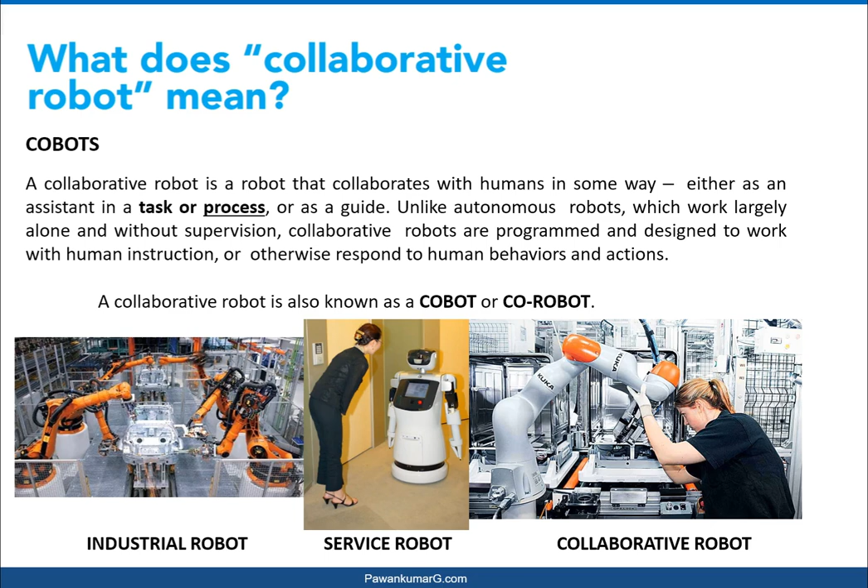So here we can understand what a collaborative robot is. It collaborates with humans in some way, like as a helping guide. Unlike autonomous robots which work largely alone and without supervision, collaborative robots are programmed and designed to work with human instructions. We shortly call them cobots. It means collaborative robots. Yeah, we'll move to the next.

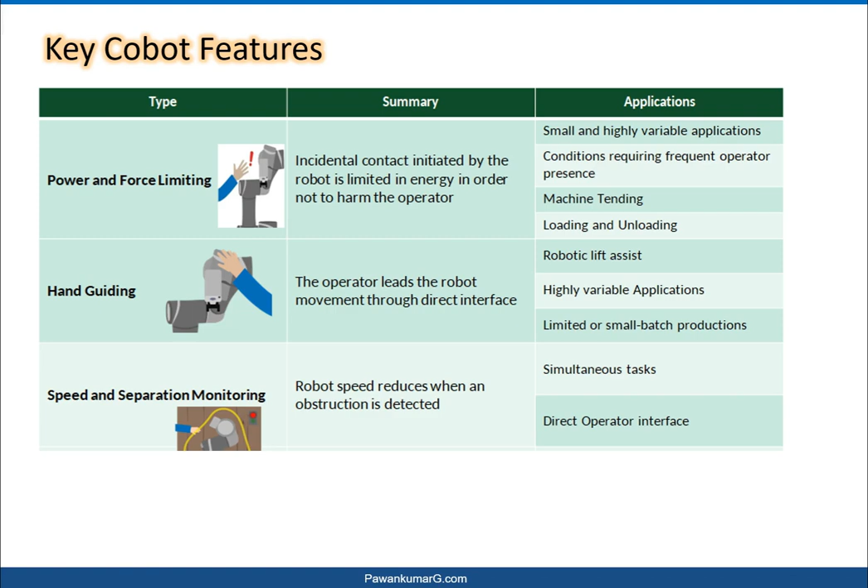You can consider that there will be safety scanners continuously scanning the area around the cobot, and whenever there is human intervention, the cobot reduces its speed of operation in order to protect humans from injuries, because more speed and momentum leads to more impact, which leads to injuries. So this feature protects us.

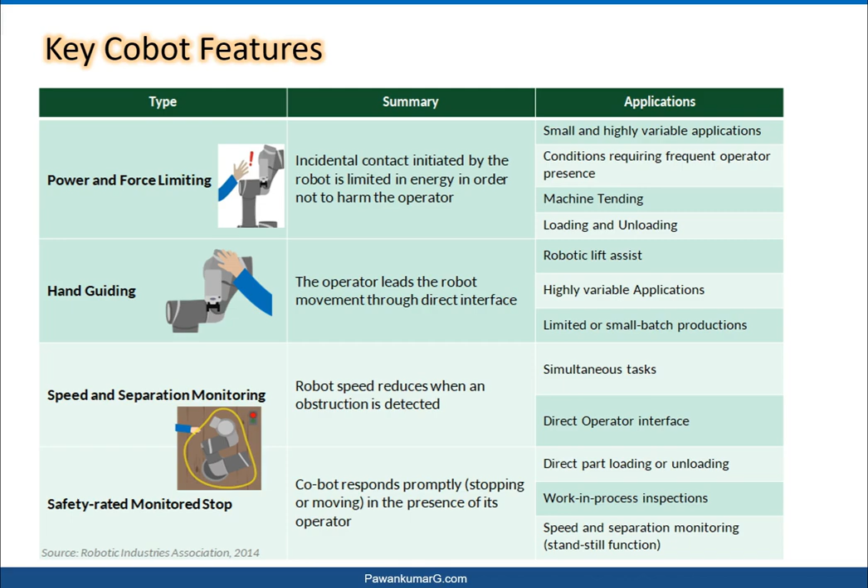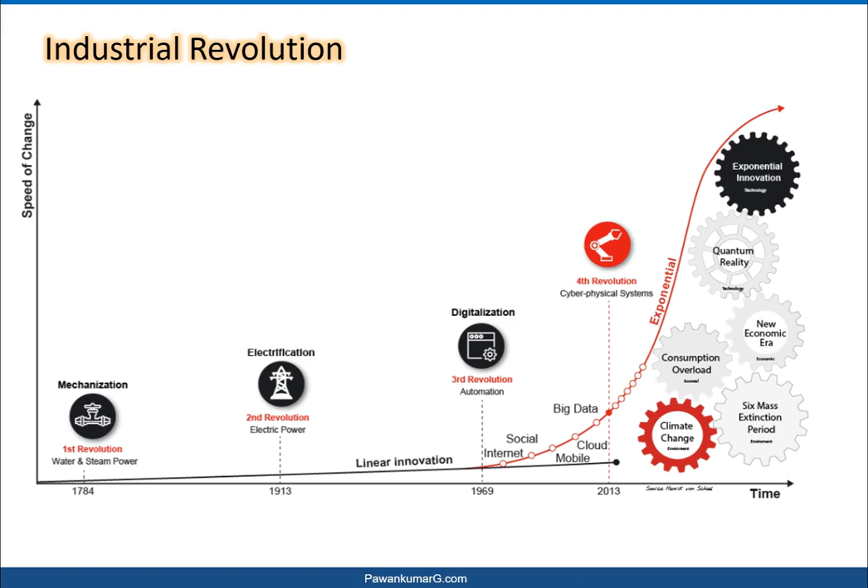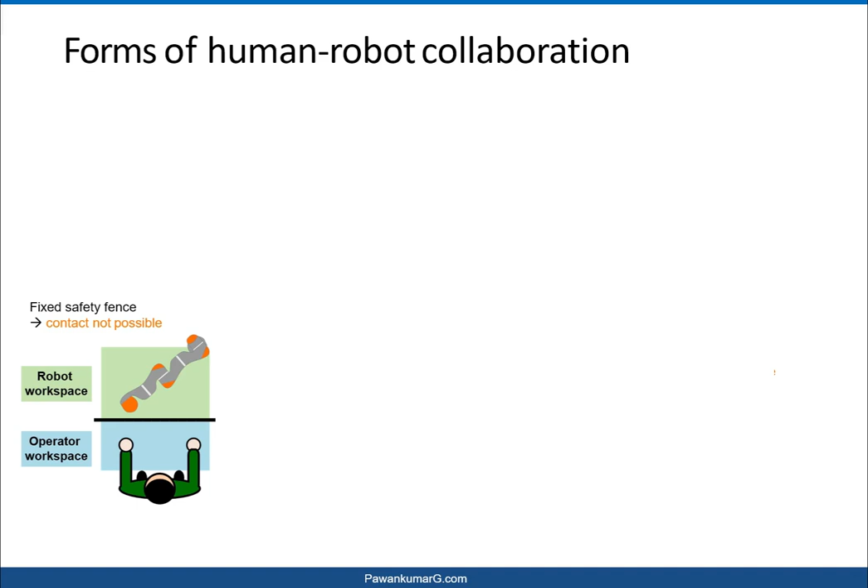So what are various forms of human robot collaboration? You can see in the green picture, man standing over the blue color workspace and robot is working over the green workspace. So both are separated from each other with the partition in between, which is shown in black color strip. So in this kind of collaboration, contact is not possible and there exists a safety fence.

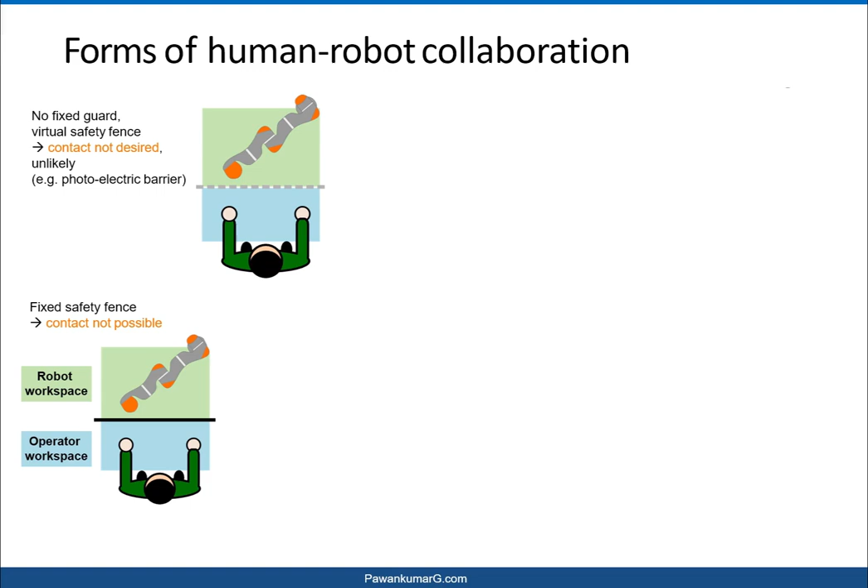In second place, you can see that both are separated with the help of a photoelectric barrier. It means contact is not desired, but if contact happens, then also no issues. Collaborative robot will detect the presence of operator in the green region and will trigger the safety stop. This kind of collaboration is used for specific tasks like loading, unloading, where operator is going to load the components to the fixture in the green.

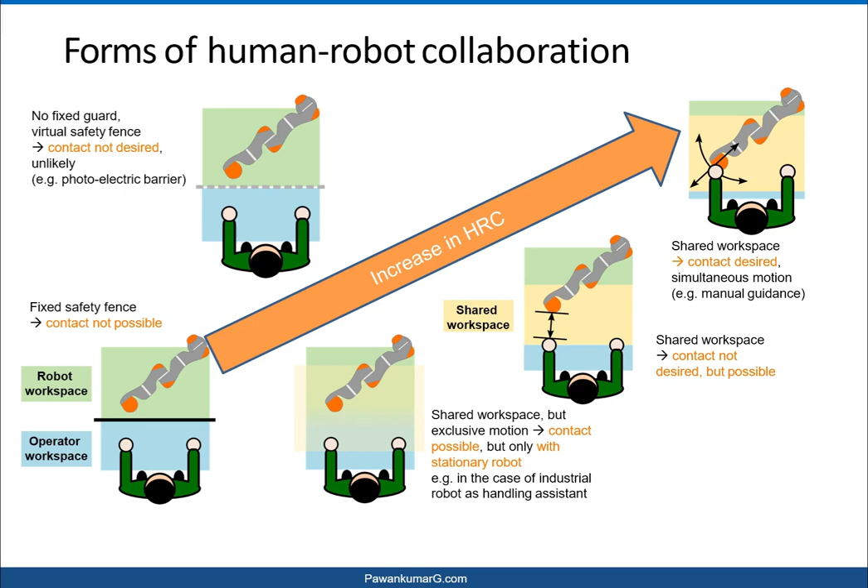So here you can see the hike in HRC, human robot collaboration. So in industry you can adopt any of these forms in the plant. So whenever you are adopting HRC, you need to see these are the cases where we can implement HRC, whether a semi HRC, like low HRC, or a high HRC, like we can see in the graph. Then we have categorized the types depending upon the collaborative effectiveness.

So coexistence, here both are separate, human and cobot. And please remember that even in coexistence, if operator enters the robot workspace, it is not going to harm him, because that's a cobot. But according to functionality, it is separated here.

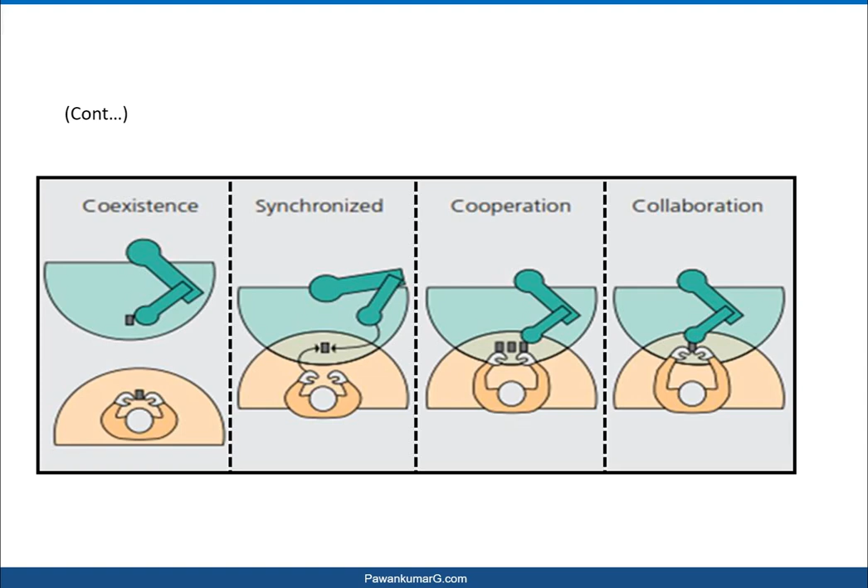So coexistence, synchronized. In synchronized, both are working alternatively, not simultaneously. In cooperation, both are working in a shared workspace, but both tasks are different. In collaboration, both task is same. It means simultaneous work is there, and contact will be happening here between cobot and human.

Next, we see benefits of cobot. So robots excel at simple repetitive handling tasks. Repetitive tasks will be quite boring for operators or human labor, but that same thing can be done with the help of cobot. Humans on the other hand have unique cognitive skills for understanding and adapting to any changes in the task.

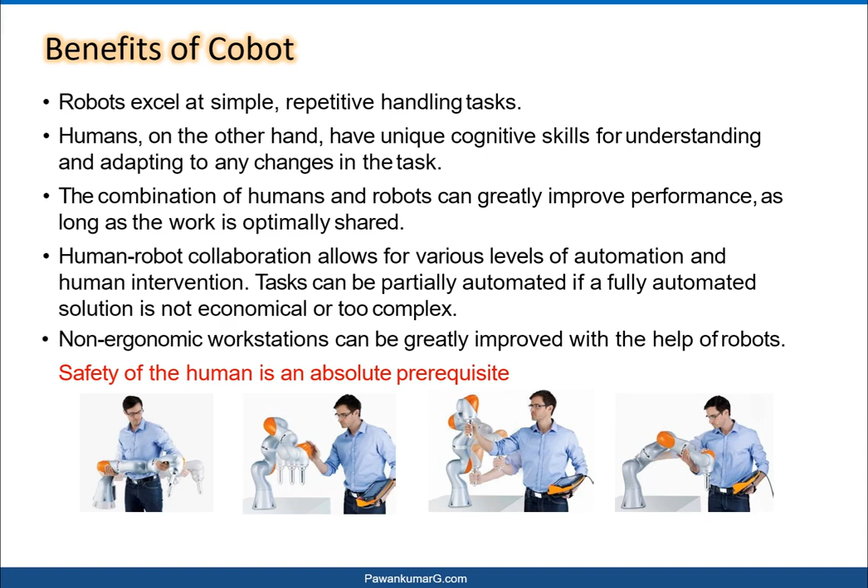So here, what we call skill, that skill we can implement with the help of cobot. That's the major benefit cobot is giving us. The combination of humans and robots can greatly improve performance, as long as work is optimally shared. So human robot collaboration allows for various levels of automation and human intervention. And even non-ergonomic workstations can be greatly improved with the help of robots here.

So another very big benefit we get from cobots is zero accidents. Nowadays plants are concentrating or focusing on zero accidents. These kinds of things are followed by plants. So in order to bring zero accidents across the working areas, we need to implement cobotic systems.

Now why ROS? Because ROS is language independent, and robotic manufacturers provide this API and SDK for ROS integration, which enables direct access to cobot hardware in real time, fulfilling the single point of control. So the ROS master will be able to control the robot as well as peripheral devices to which it is connected.

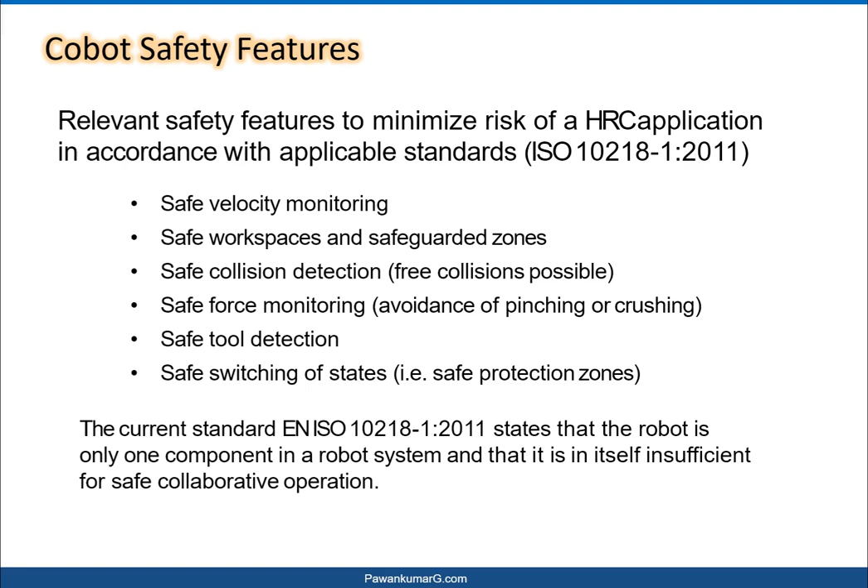Tool detection and safe switching of the states. Yeah, so the current standard states that the robot is only one component in the robot system, and that itself is insufficient for safe collaborative operation.

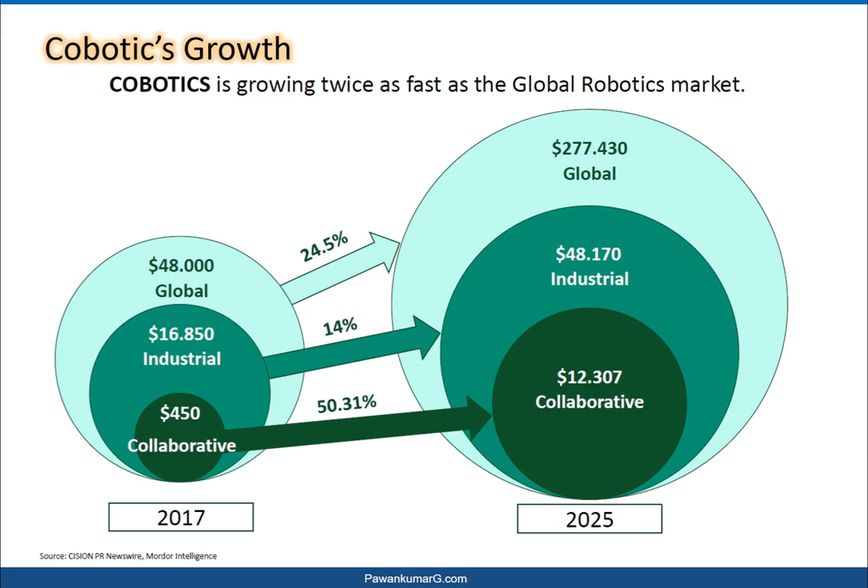So you can see the graph. We just see how cobots will be growing in upcoming days. So we are in 2020 now, and if you see the 2017 graph, you can see the pictorial representation of how much explosion will be happening by 2025.

So moving to next, increasing adoption of cobots. So the cobotic market, you can see here, revenue is also growing day by day. You can see how it is rising, and even the number of units shipped every year is also growing much more. By Europe, North America, Asia Pacific, and the rest of the world. So in 2015, how was the graph?

Europe is considered a large consumer of cobots, and even the automotive sector is very good for cobots. These are the applications where cobots are used, like material handling, general assembly, painting, inspection, others and welding.

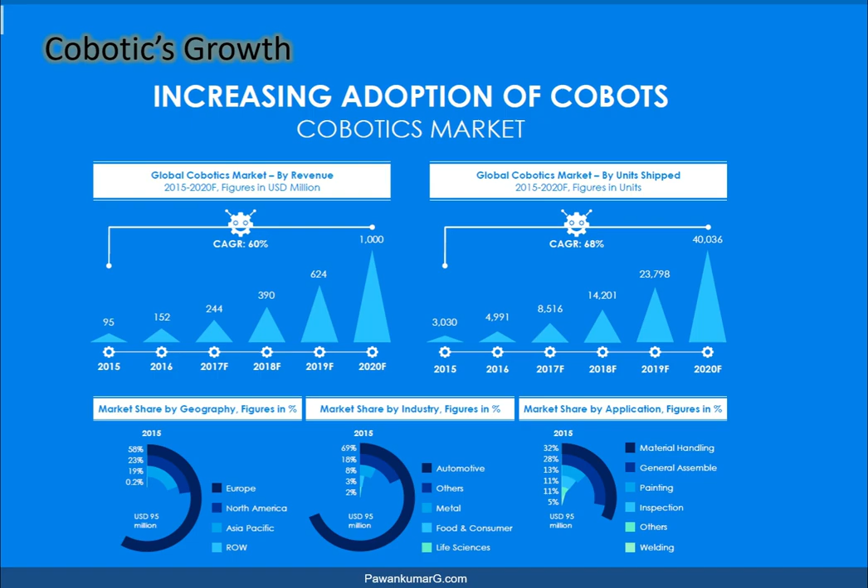So moving to next, what are the cobot types? Cobot types here means the basic types which are in the market now. If you go into the market and search for cobots, major manufacturers offer them in two categories. One is the lightweight robot and another is the two arm robot. A lightweight robot is just a simple single articulated robot, and two arm means there will be two arms, two articulated manipulators connected to a single body.

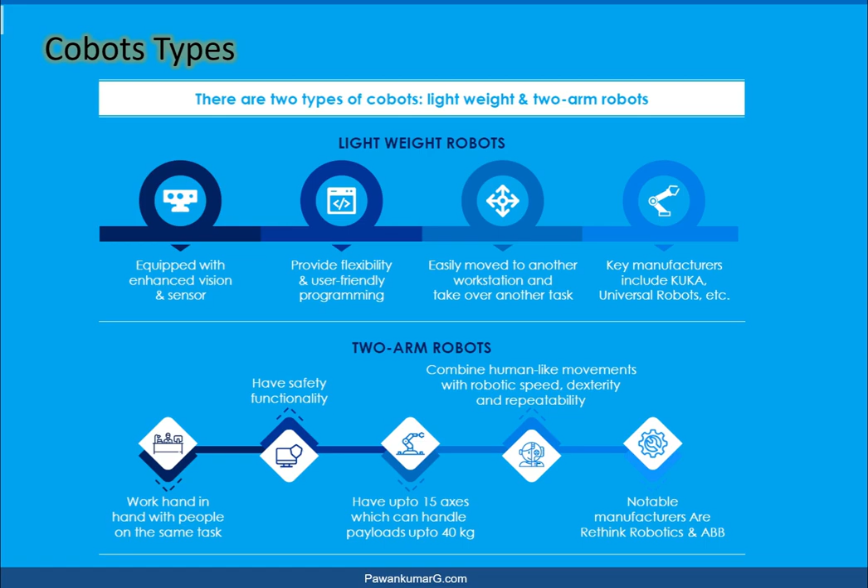These function like humans. So you can see lightweight robots are equipped with sensors, providing flexibility for programming, and key manufacturers here are KUKA, Universal Robots. If you see two arm robots, we have 15 axes which can handle payloads up to 40 kg, and major manufacturers for two arm robots are ABB, Rethink Robotics.

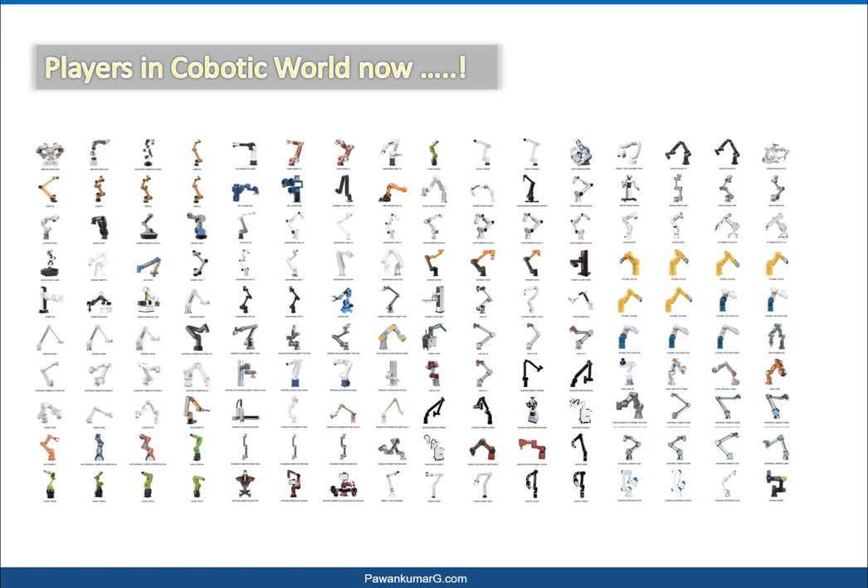Okay, so these are the players in the cobotic world now. If you go outside, you can find this many cobotic manufacturers. They are majorly of Chinese and Japanese origin. So you can see the first robot shown in the picture is a two arm robot, and the remaining ones are single arm articulated.

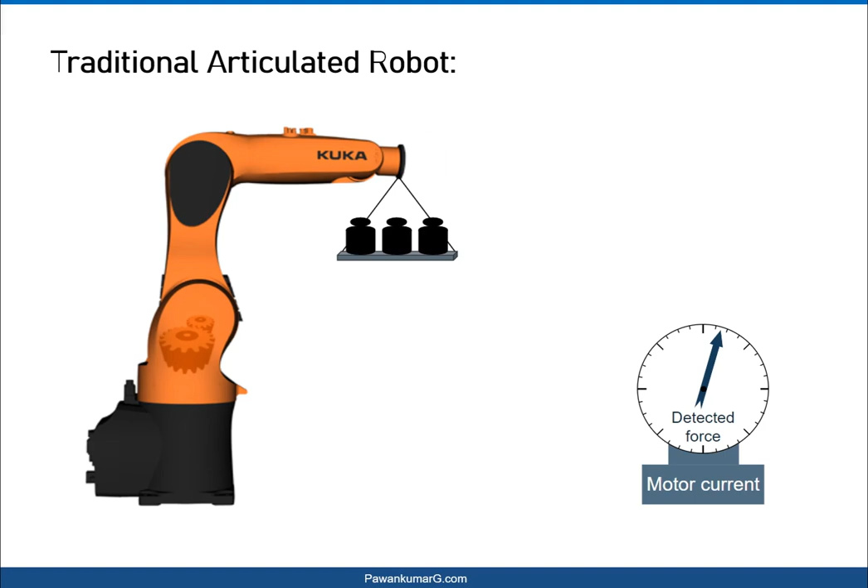So what is the primary difference between a robot and a cobot? See, this is the traditional articulated robot which you are familiar with. These robots are just mechanical, electromechanical machines which are working inside a cage. It means they are not able to detect any external force. You can see in the example, I have attached some weight to the flange, to the end effector of the robot, and the detected force here is very less sensitive.

Why less sensitive? Because it is using motor current feedback from the servo motors. So these values are not sensitive. That's why we can't rely on motor current feedback kind of detection. So what I did, we attached one force sensor over the end effector, and now we are measuring the weight. Now you can see the difference. Motor current is detecting some small force here, it is negligible, it is not able to detect, and the force detected by the sensor is actually very high.

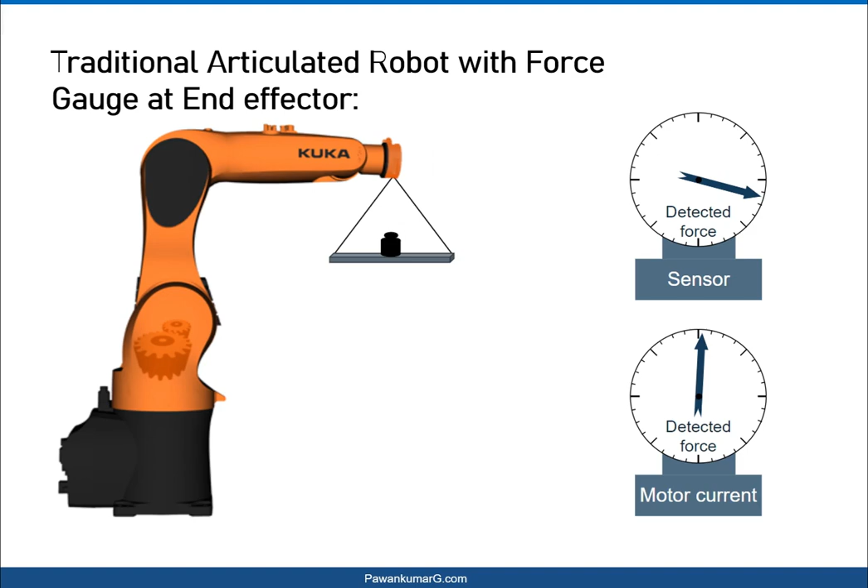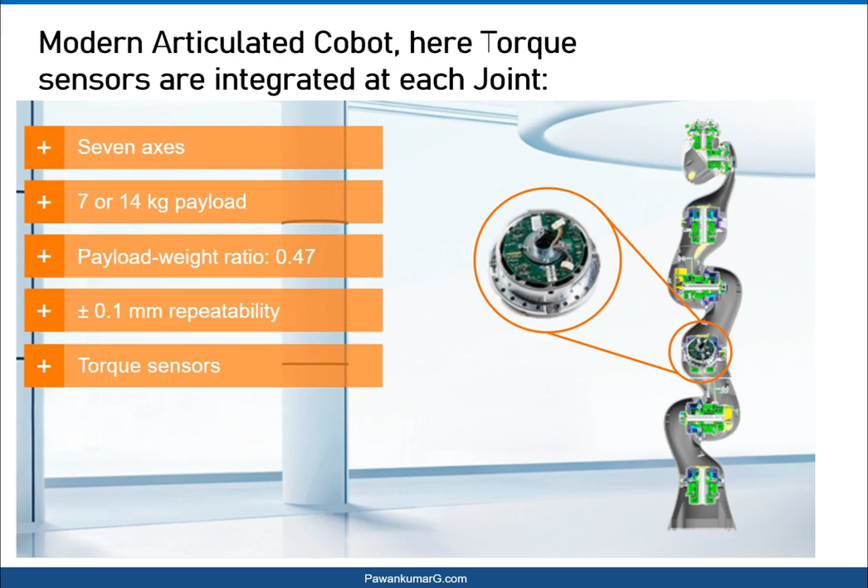So what we do usually is integrate this force sensing into all of the axis motors to detect external force. This cobot is not only meant for positional kinematics, but it also has force kinematics. It means the cobot is able to detect force at the TCP with the help of the kinematic chain of these torque values. Each and every axis is giving some torque value. With that value, the cobot is able to detect how much force is applied at the TCP, a virtual TCP, anywhere in space. This capability allows us to program cobots for certain complex applications where we need sensitivity.

So first, the major application is in assembly. Why? Because assembly needs some human intervention, it is sometimes complex, and there is more productivity when we integrate the cobot with the human, right? Human intervention is there, so we need to concentrate on assembly. In assembly you can see some examples like screw driving and part insertion.

The next application is dispensing. Dispensing means we can use it for applying glue, seal, or painting. For painting applications also you can use a cobot, where a human can intervene during sealing, gluing, or painting in some complex areas. This kind of application provides proper collaboration, and we can achieve good productivity and efficiency in painting, gluing, and sealing. Next, finishing. Finishing means sanding or polishing.

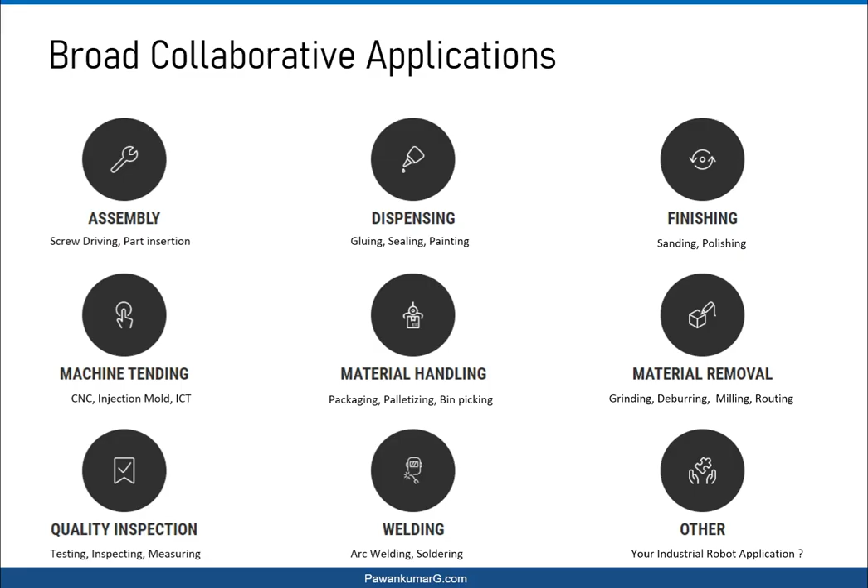Next, machine tending in CNC, injection molding, ICT, we can use it. Material handling, packaging industries, palletizing, even bin picking can use cobots to eliminate cages in low footprint areas, because packaging usually has very low space. Even in material removal, grinding, deburring, milling, routing, again force detection is very crucial. Quality inspection, welding, and other applications also. Even in welding we can use cobots. Universal Robots already has applications for arc welding and soldering.

So we will see what collaborative assembly is. Assembly robots are used for lean production and industrial processes, and have expanded production capabilities in the manufacturing world. An assembly line robot can dramatically increase production speed and consistency. They also take over tedious and dull assembly line jobs.

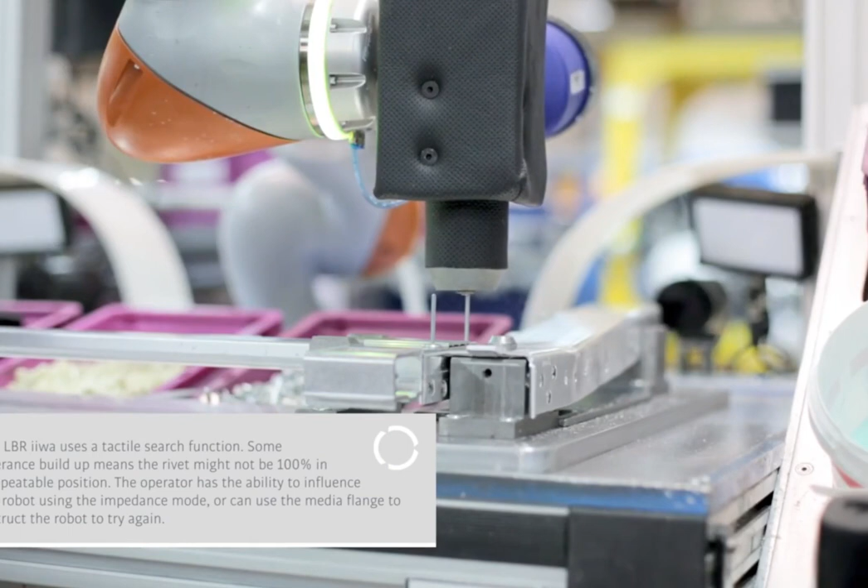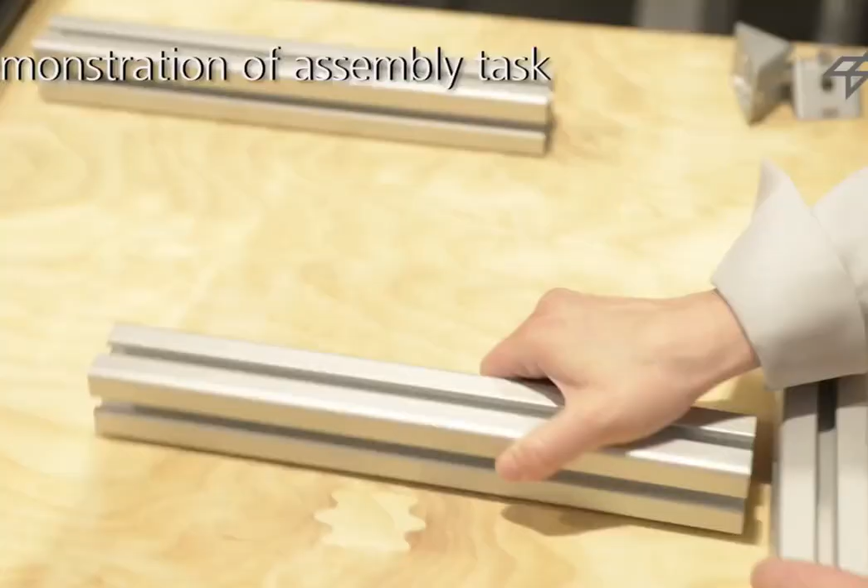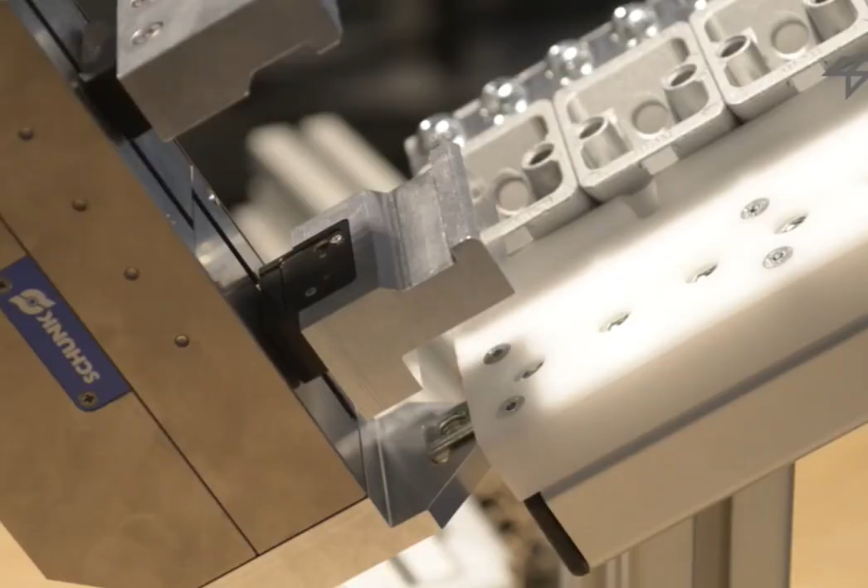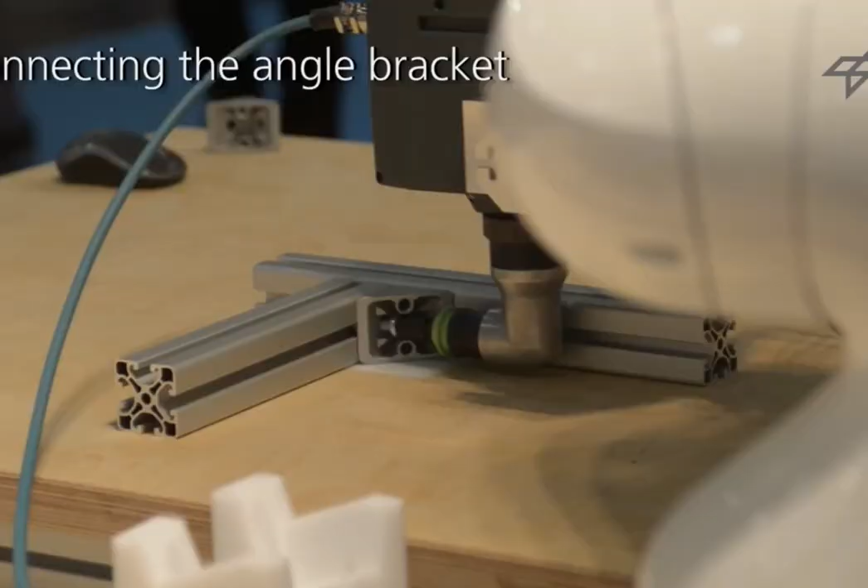Next slide, you can see here we are using a vision system. So this assembly task will be carried out with the help of vision. The camera is recording what the procedure of assembly is. Once teaching is done, and teaching is also automatic, once automatic mapping is done, the cobot is going to do the task in reality. So this is how it is working there. So after assembly, we will get the same assembly component which was taught earlier by the operator.

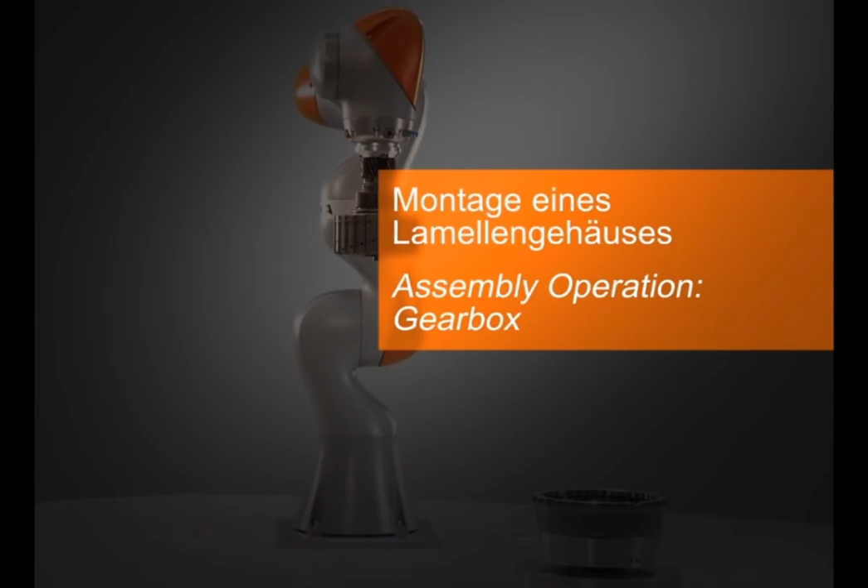So next, see gearbox assembly. Gearbox assembly is also one of the complex assemblies. We can see the robot became compliant during insertion in order to accommodate some irregularities.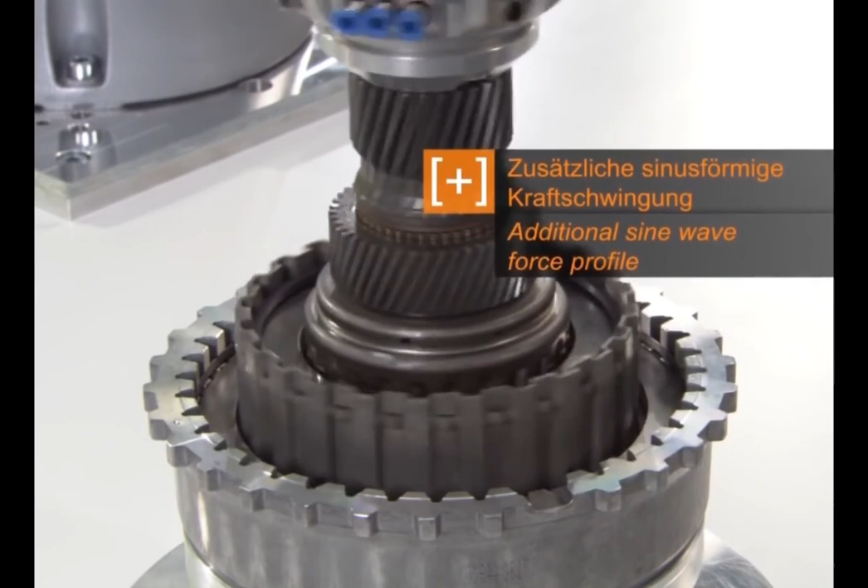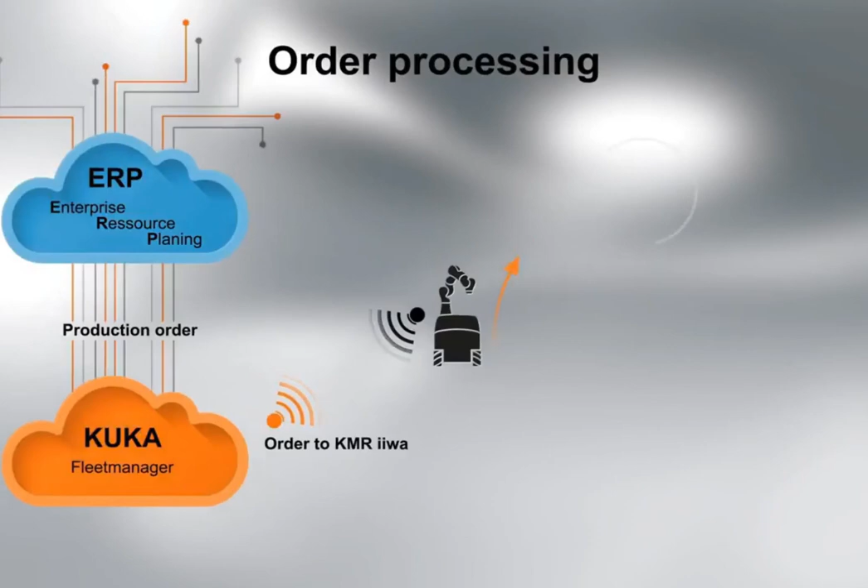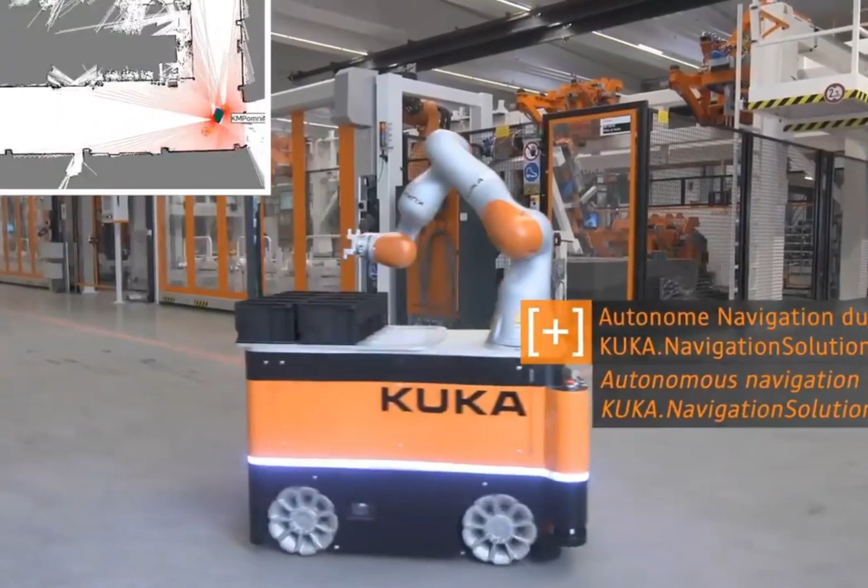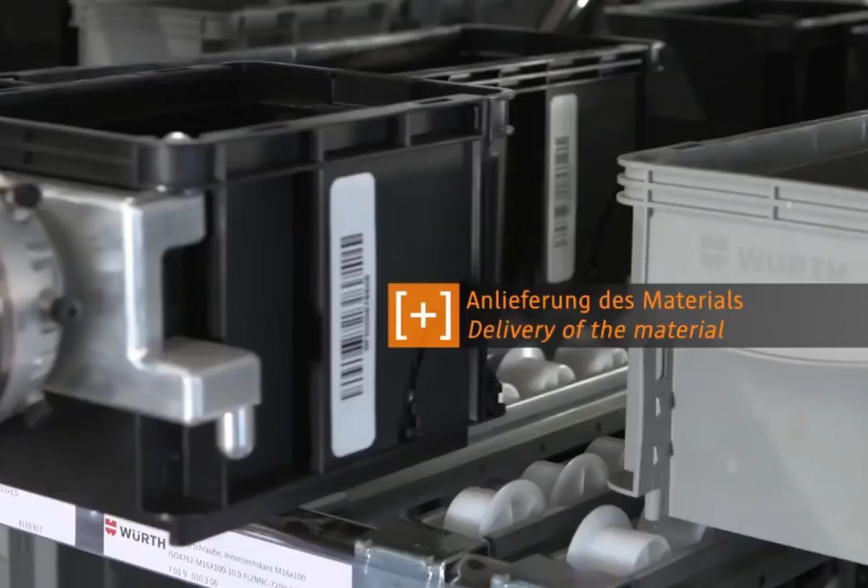Then we have some material handling here, we can see in the video. So in material handling, this is mobile handling which is connected with the ERP fleet manager. So the cobot is able to load the component on the mobile platform, and the mobile platform uses SLAM technology to locate inside the plant. So you can see there was a scanner which detected human presence, and now it is going to unload the tray to the needy one. So this is how mobile handling is working in the plant.

This is again collaborative. Next, milling and grinding applications are also there. Building dexterity into a robot provides a manufacturing option that is otherwise very difficult to automate. An example is the production of orthopedic implants such as knee and hip joints. Buffing and polishing a hip joint by hand can normally take 45 to 90 minutes, while a robot can perform the same function in just a few minutes.

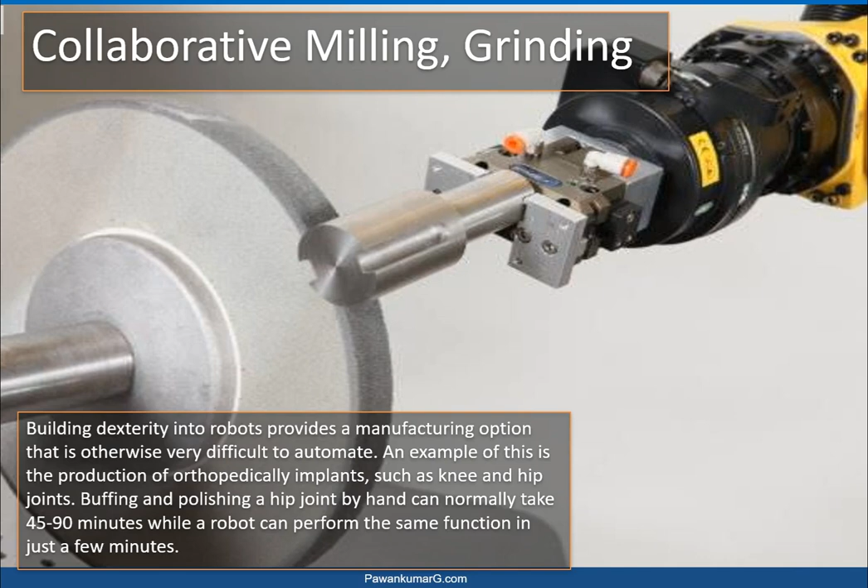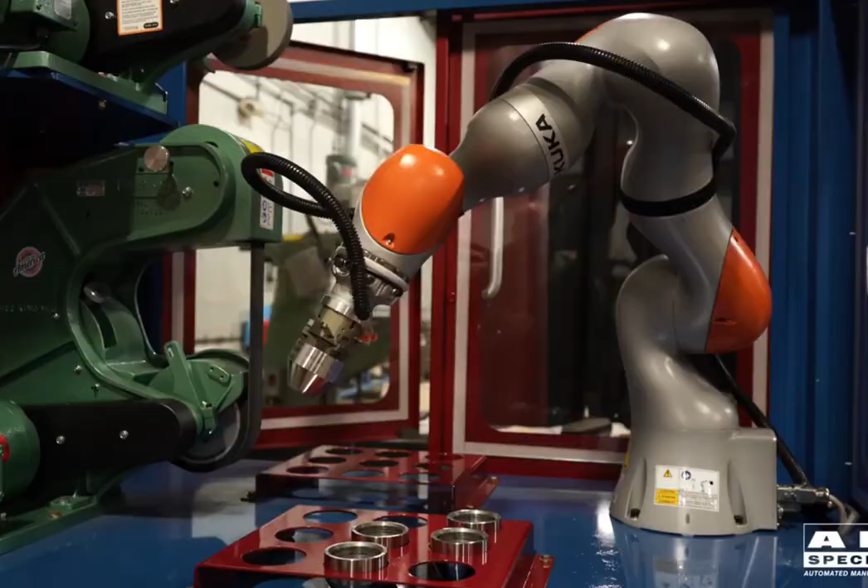Grinding application again here, collaborative grinding. So here also you can see force is detected by the robot. It is holding with a constant force there, so that over or lower run will not happen. And this is again a kind of collaborative application.

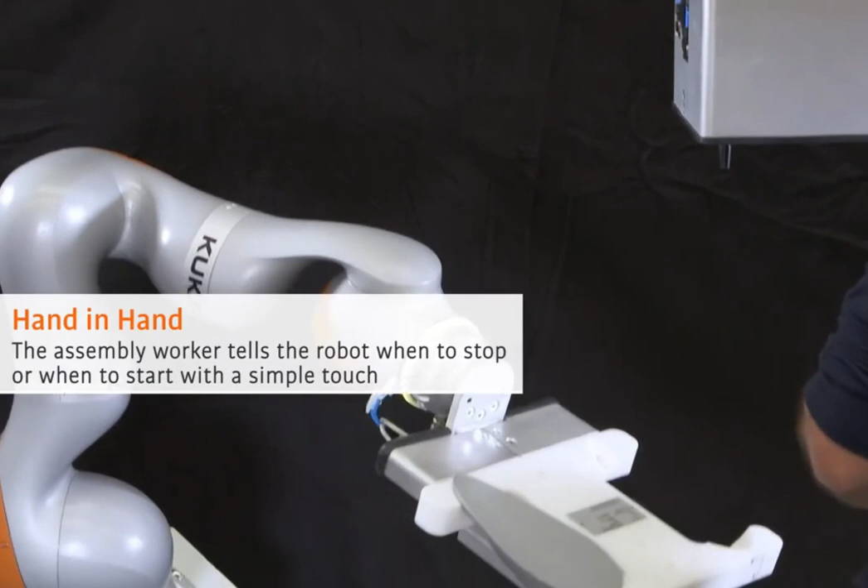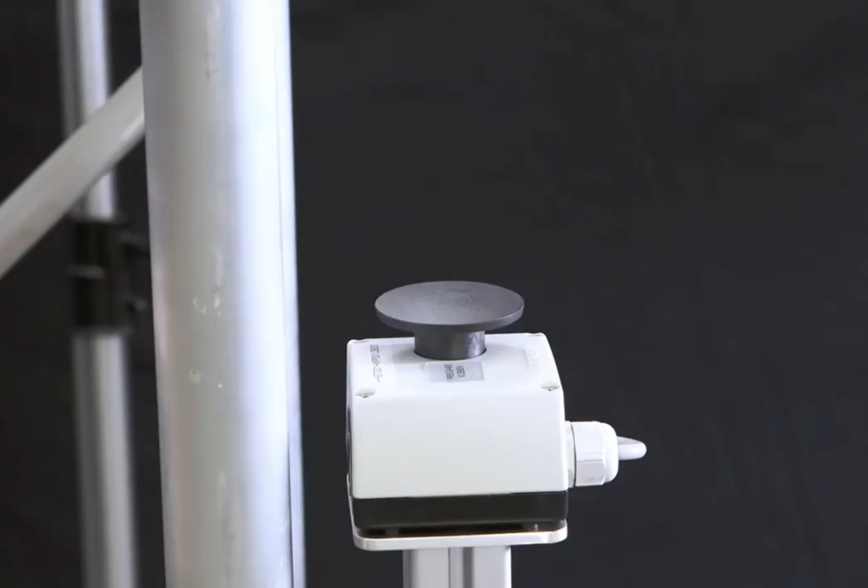We have applications, then we have gluing also. If you see the gluing application here, it is dealing with the operator. You can see he just gave a gesture to the cobot and it stops, and again he will give another gesture. This is the input, a kind of safety input, and then it is resuming its work. Even here you can see collision detection. This is force monitoring. So the robot is triggering a reversal motion.

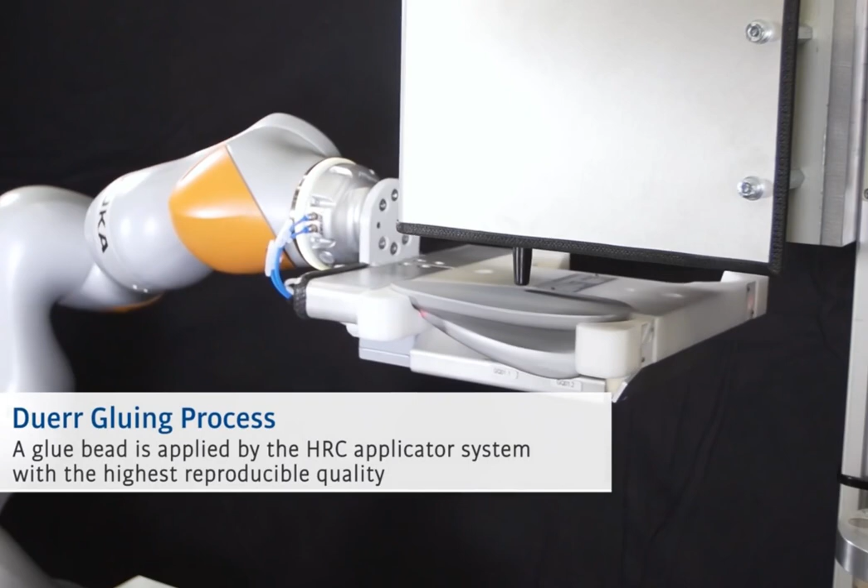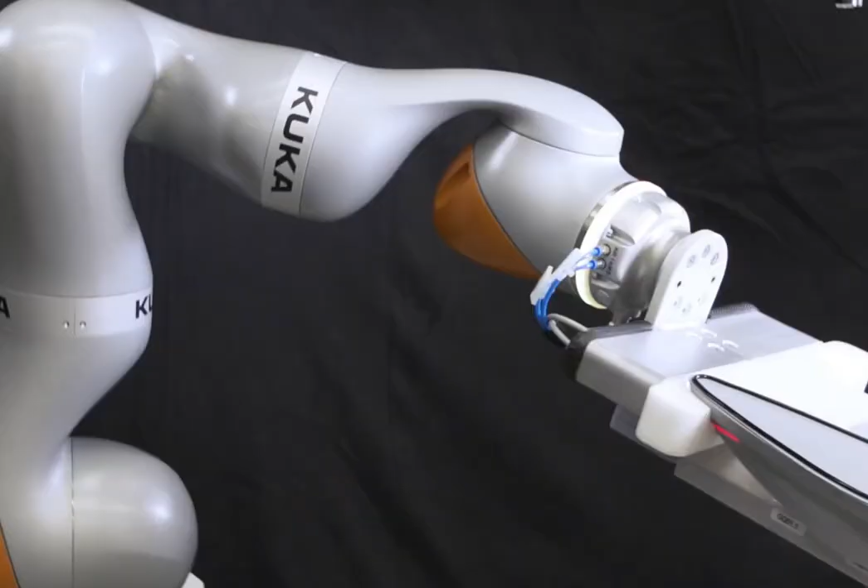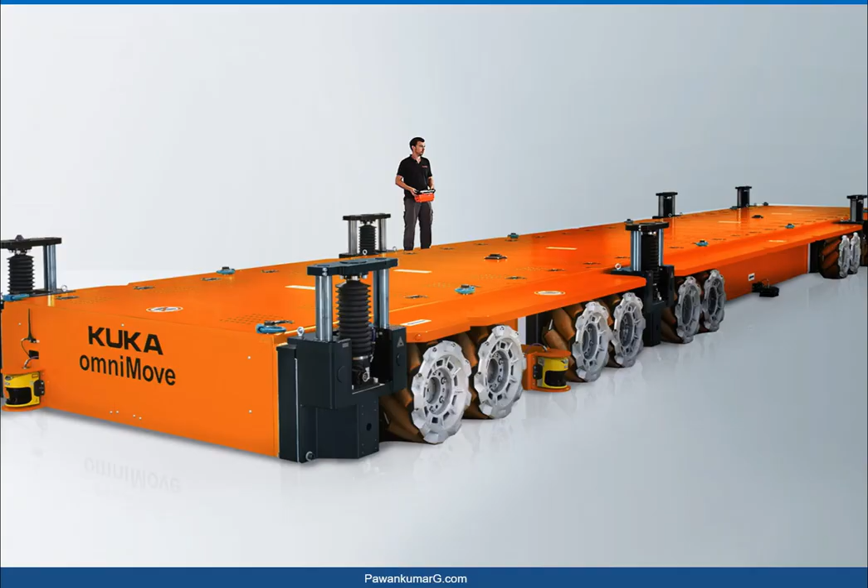Moving to next, we have another example from Siemens rail system in Germany. You can see they are using OmniMove for handling bogies inside the plant, moving them from one place to another. So they are using KUKA OmniMove. OmniMove is another kind of platform developed by KUKA, and it can be controlled with a wireless pendant. So you can see the example here.

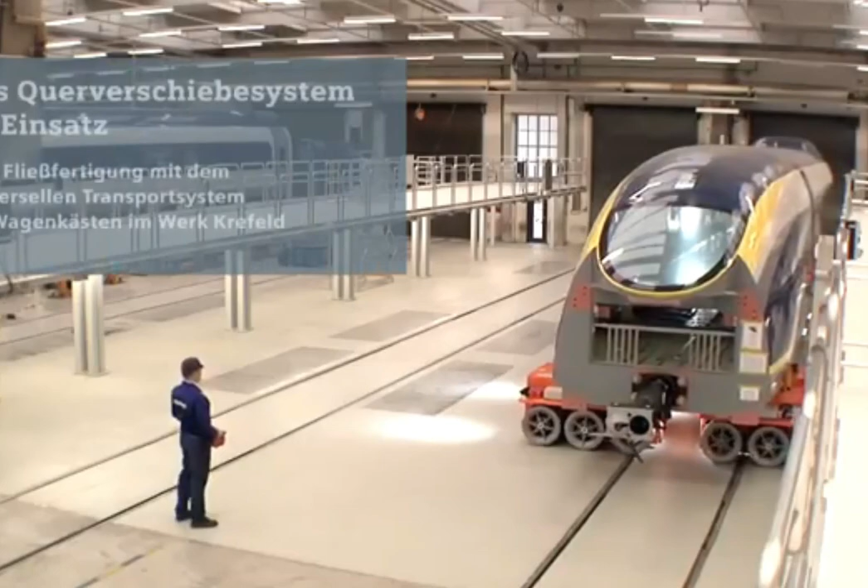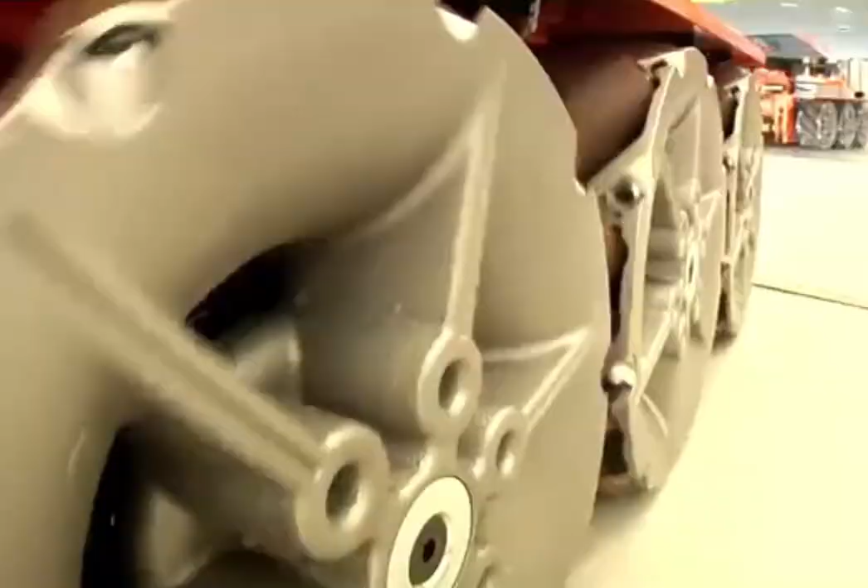The operator is going to move it manually. It is enabled with OmniMove wheels, Mecanum wheels. Mecanum wheels provide you flexibility to maneuver your system anywhere in the space, excluding the Z direction obviously. And this is going to dock, and then there will be lifting of the bogie, and we have handled it. This is another kind of application with the mobile platforms.

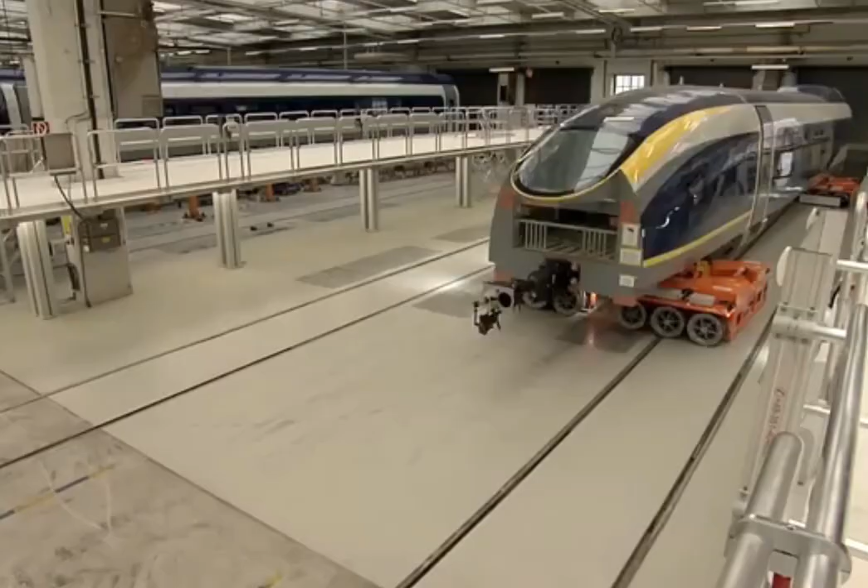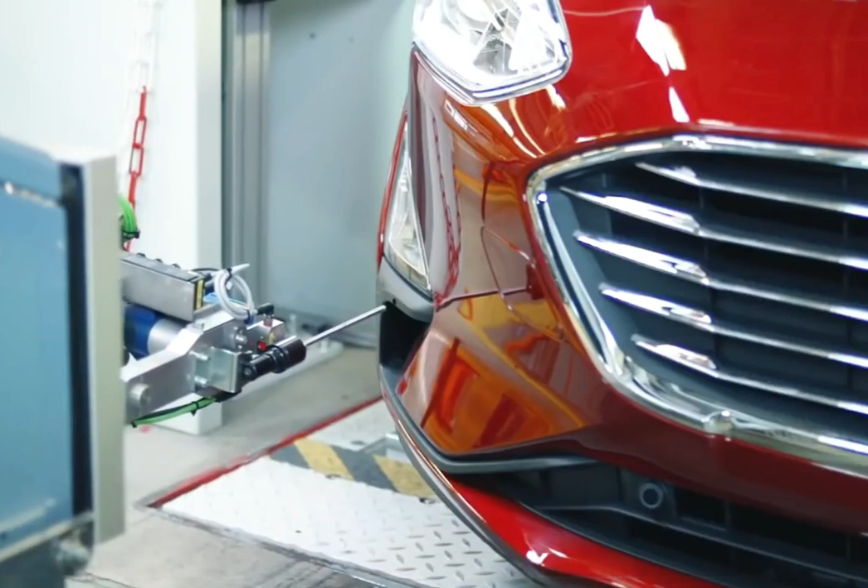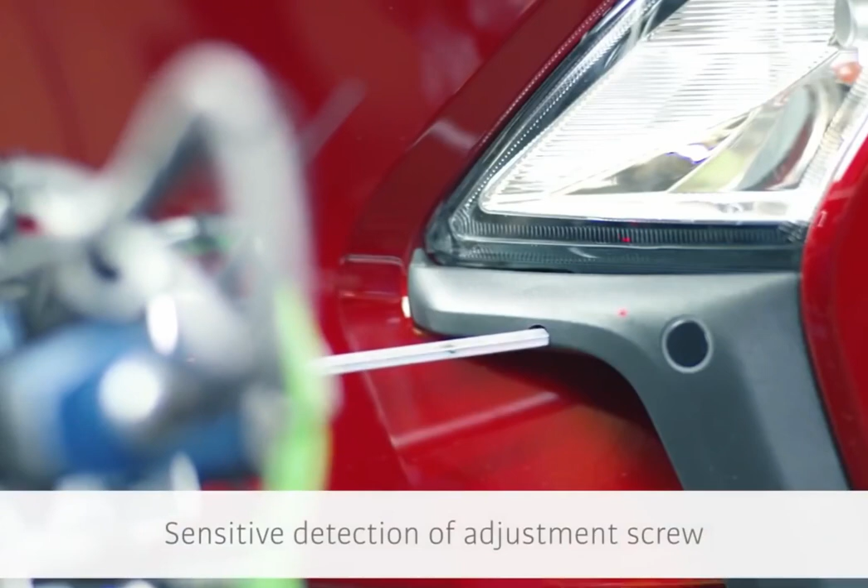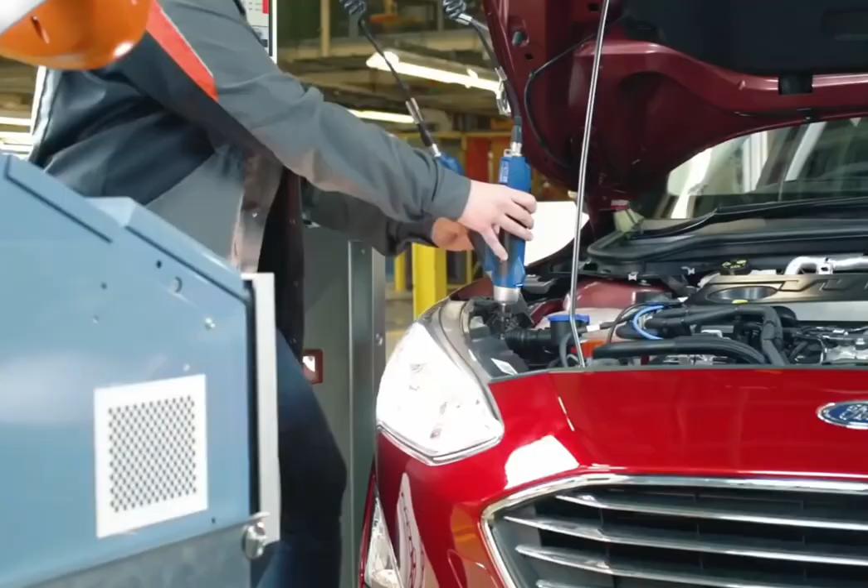Next, you can see we can use cobots in some complex applications like adjustment, because adjustment needs force feedback. So here the cobot is inserting an Allen key, and then it is adjusting the headlight rays. This adjustment takes a few minutes to complete, whereas a human operator will take much more time. So you can see it is just adjusting the angle of the headlight.

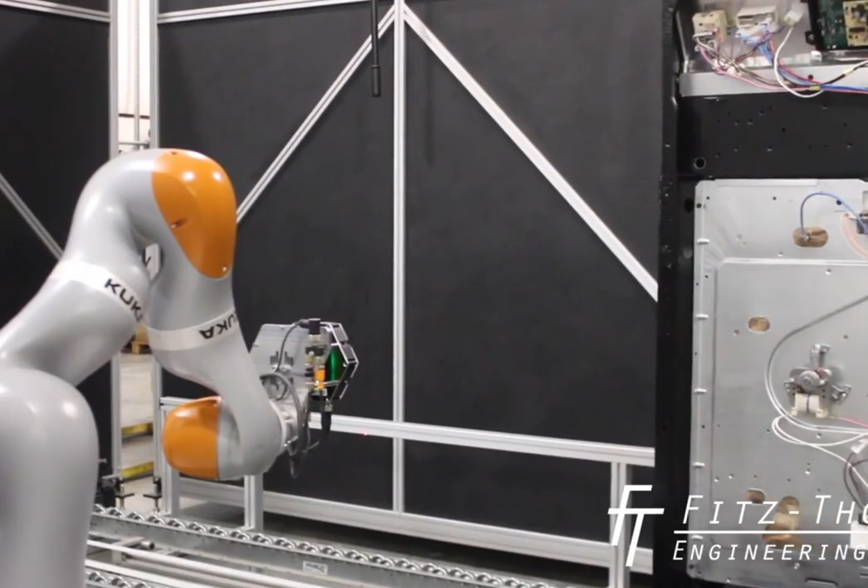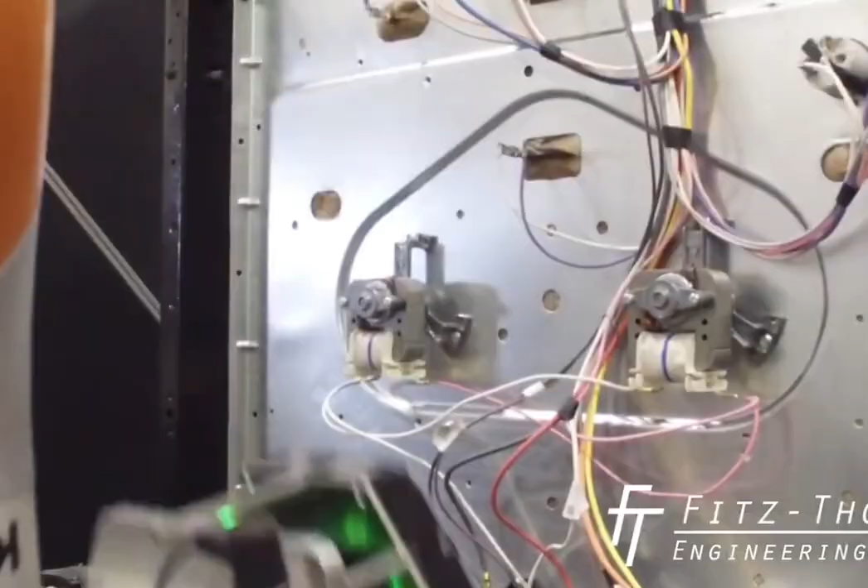We have inspection also here. Inspection is also done with a collaborative robot. It is going to take some pictures, and image processing is carried out for detection of any malfunctions or problems.

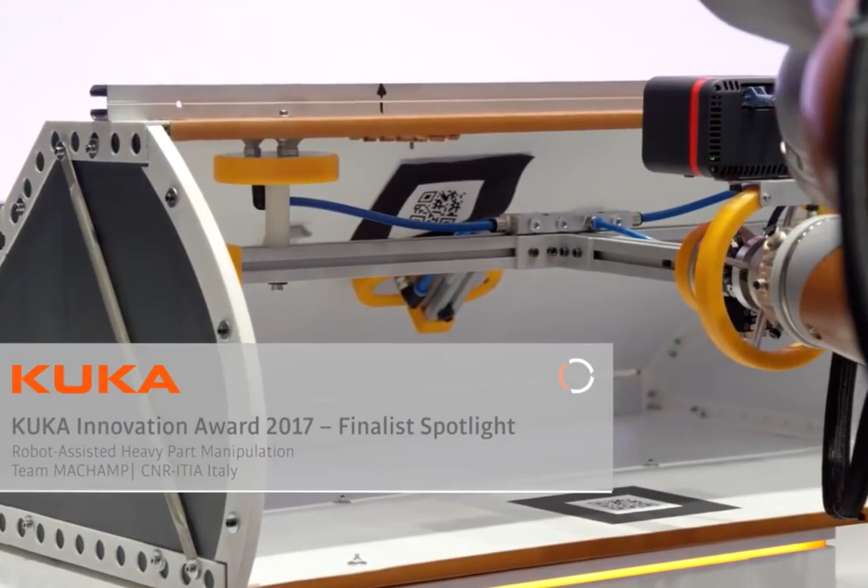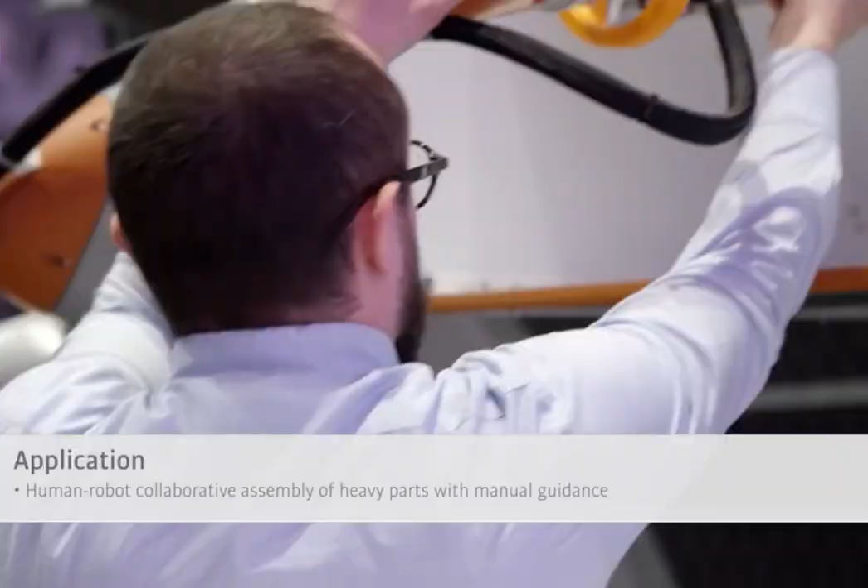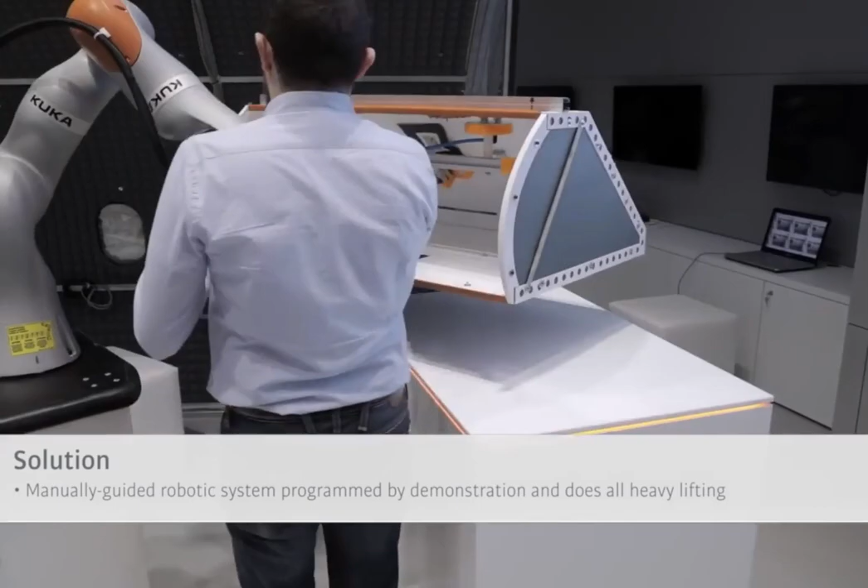We have manual guidance, which we also call zero gravity. It means it is assisting the operator in carrying heavy loads. Whenever the cobot is holding that component, it is in impedance control. It means the operator can take that component anywhere in the space, and he will feel weightlessness. The cobot is going to comply, or compensate for that weight. So the operator is able to carry the load from one place to another without actually bearing the load in his hand. This is another application with the help of cobots.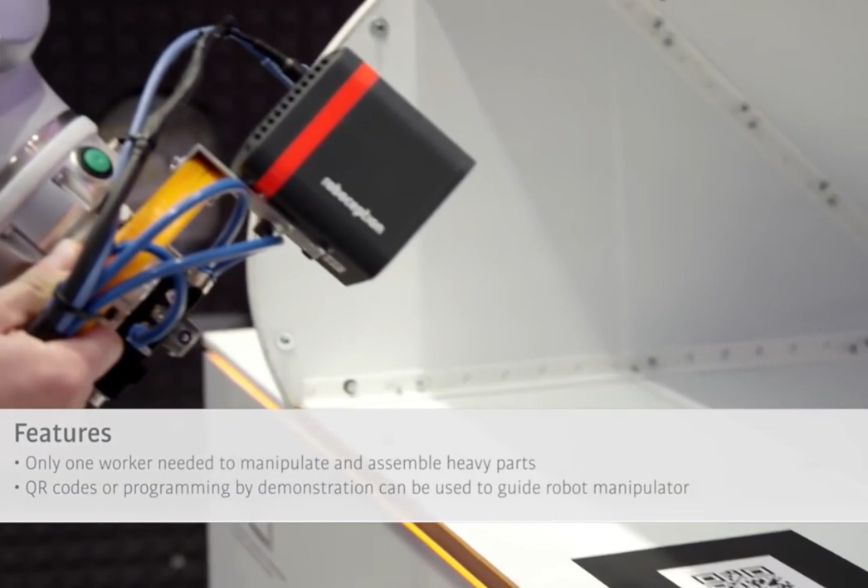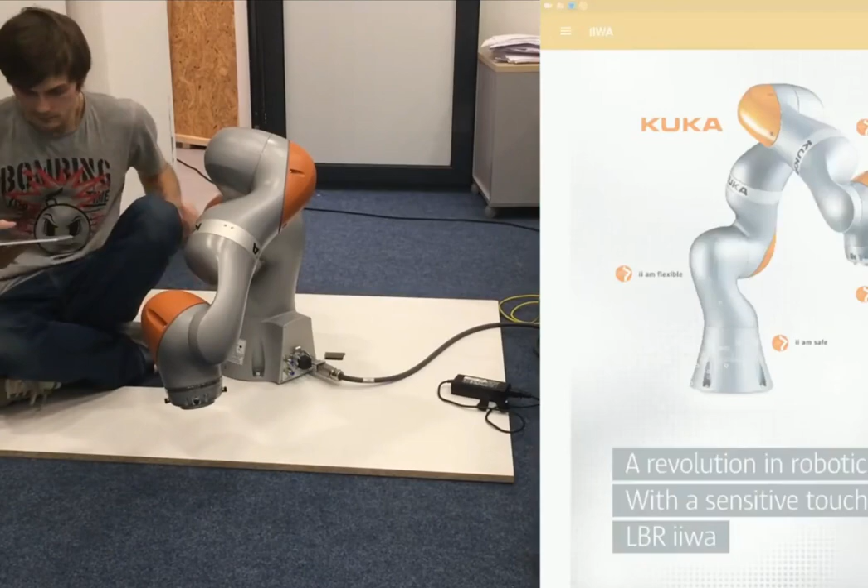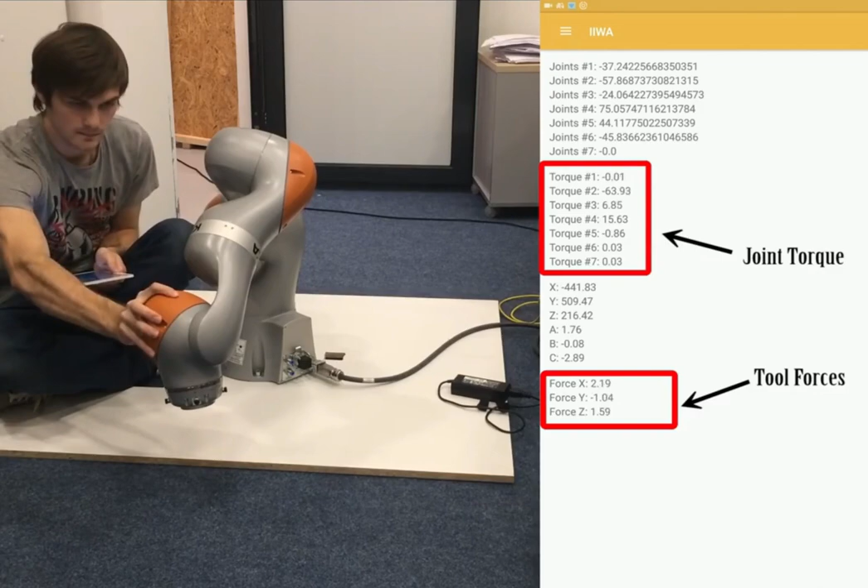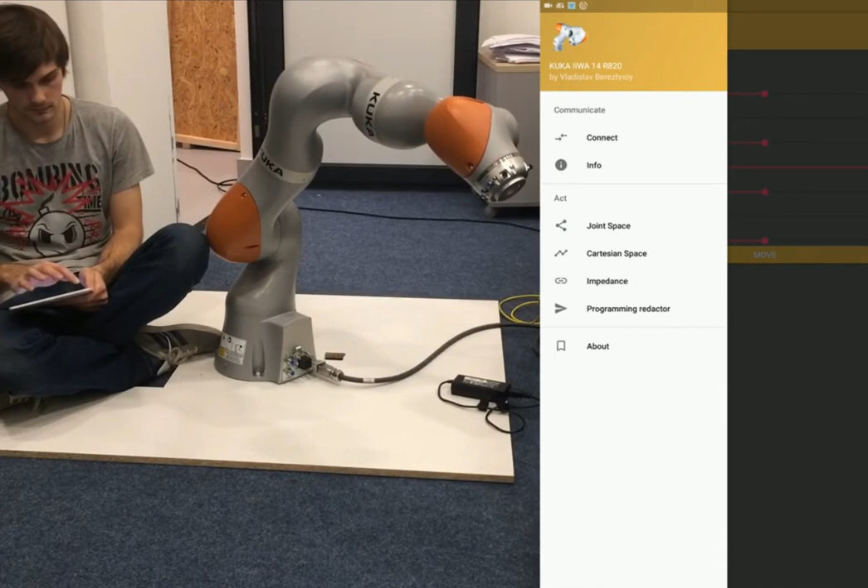So next, you can see this is a kind of IoT application. Why I included this application here is because you can see how we can use ROS support for integrating with IoTs and mobile apps. You can see in the video, the college guy is using the application. He entered some IP, and then he's going to connect with our controller.

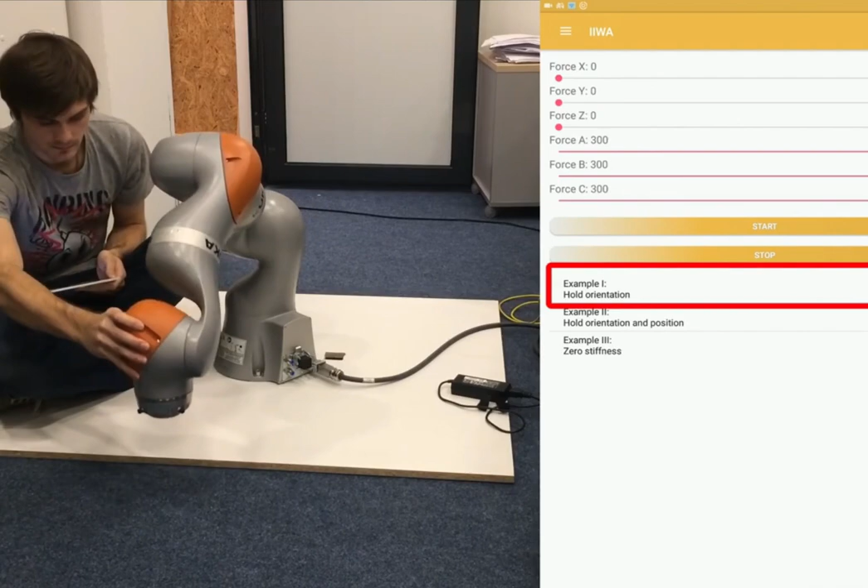Then in real time he's getting torques and tool forces, and when he wants to jog the cobot, it is also possible in real time. So you can see in the video, even in Cartesian space and axis specific, he is able to move the cobot.